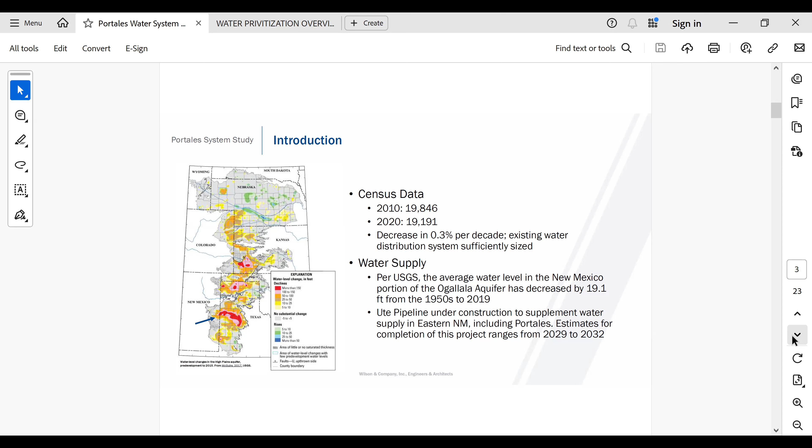We got all of the data from the operators here. We were able to come up with some numbers regarding the current water use in Portales. That's on that figure here. In 2023, Portales used 801 million gallons of water, and that came out to, all sources, about 115 gallons per person per day. And then we also looked at how much water was drawn from the wells to provide the city, and that came to 780 million gallons taken out of the Ogallala aquifer that year.

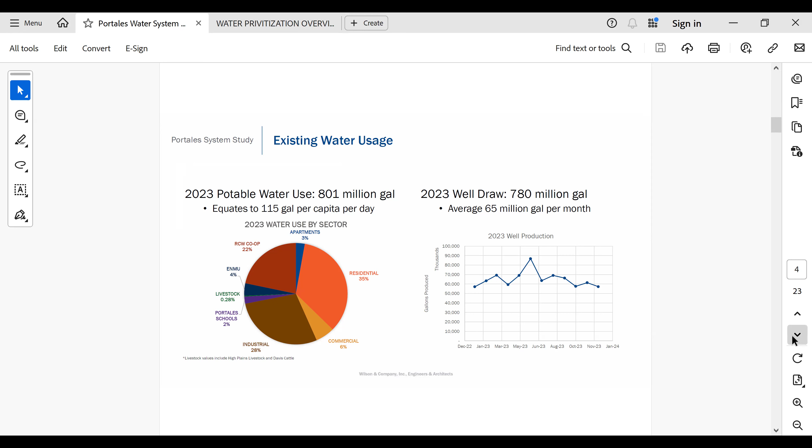If you're looking at those two numbers and realizing that they don't quite add up, the metering data kind of shows that Portales used more water than they took out of the well. And that can be accounted for by all of the meters that we're trying to sum up and equal out. The well field is very large. Does it say up there how many? I think it's up there at like 50 wells, and they all have their own personal meter. And then there's over 6,000 use meters.

So the difference between those two numbers, the amount of water used and the amount of water drawn out of the aquifer, really comes from just metering error in between the two. It's only a 1.9% error, which is fairly common when you analyze water systems.

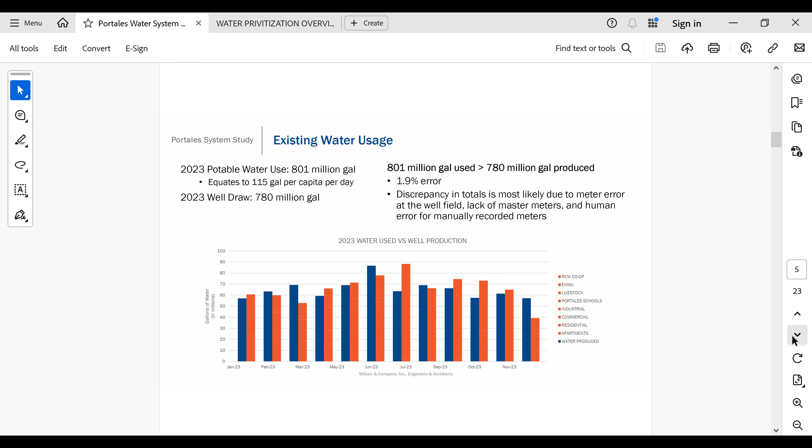Can everybody hear me in the meeting? Yes. Okay, perfect. My coworker worked on modeling the existing system, so I'm going to let them speak for the next couple slides. Okay, thank you, Graham. Hi, I'm Ezra Crumley. I worked on this with Graham. I'm actually in Albuquerque right now. I'm sad that I couldn't make it in person, so I'll be presenting online.

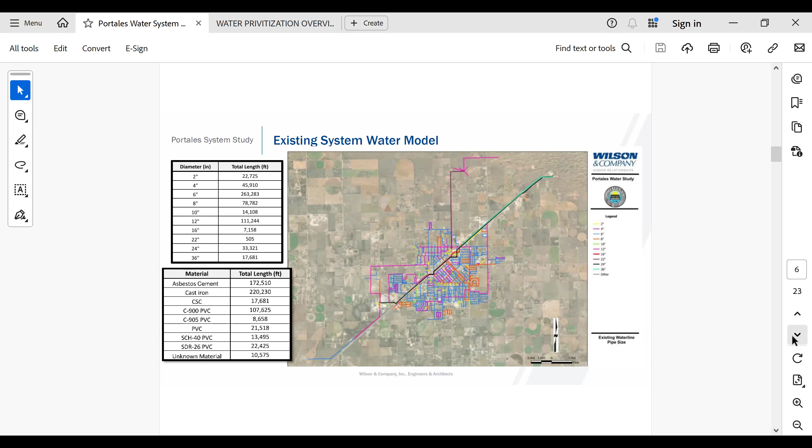So in order to model your current system, we worked with your utility department to get the existing data out of their shapefiles from the ArcGIS system, and we uploaded it into a water model program called WaterGEMS. And using it as well as the data that we have for the pipe sizes, like pipe diameters, as well as the pipe material, we were able to put together this model of your system. It also has meters as well as fire hydrants included. And in total, you guys have about 115 miles of water line for your potable system only. Next slide, please. Thank you.

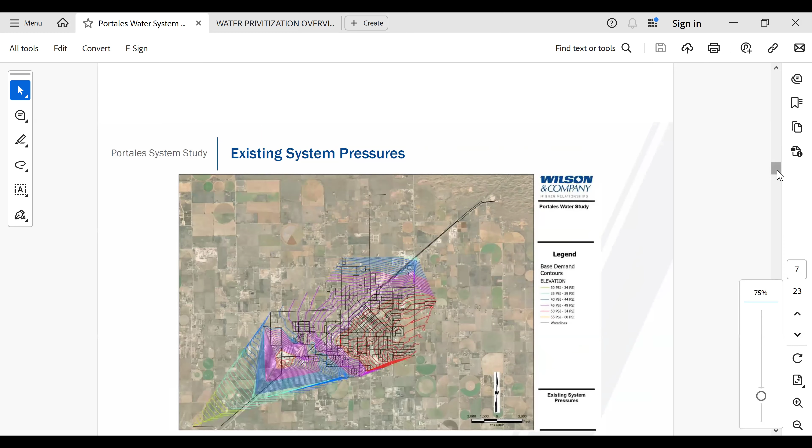So once we had the water model in the system, we also used all of your demand data. So we had all of the information from your automatically billed meters as well as your manually read ones. So your residential users, like your apartments, your houses, your industrial users, your commercial users, as well as the schools and the co-op were added to the system as meters. And using that as well as the hydrant tests that the city of Portales had conducted about a year ago, I think, we were able to model the pressures that you would see in your system.

So as of right now, it looks like your pressures are between 30 and 55 psi, with your highest pressures in the southeast section of town, and your lowest pressure is all the way down at the airport at that very last hydrant. So that hydrant has a psi of about 30, but your lowest in-town psi is over on Children's Drive, and that's actually at 40 psi. So it isn't uncommon to see very low pressures at the very end of a system. So this is normal.

We also see no major pressure fluctuations in the system. We see lower pressures, as I said, towards the southern part or dead ends where we don't really have that many users pulling water, where higher demands have the higher pressures in them, like around the industrial area and your southwest or southeast quadrant. Next slide, please.

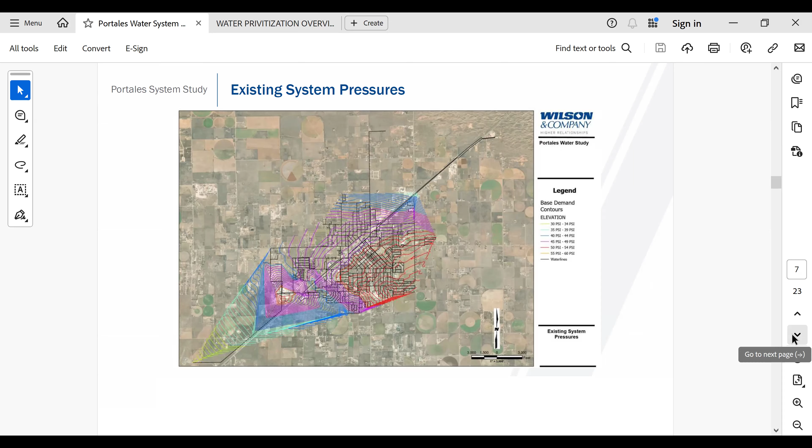Thank you. And then using the hydrant data, we also were able to calibrate the system to make sure that it actually kind of was in, oops. There you go. I'll keep talking. Thank you. We used it to calibrate the system. So using the in-person field tests, we were able to load those into our water model and make sure that our pressures were in line with what we see in the field. And good news, they all do.

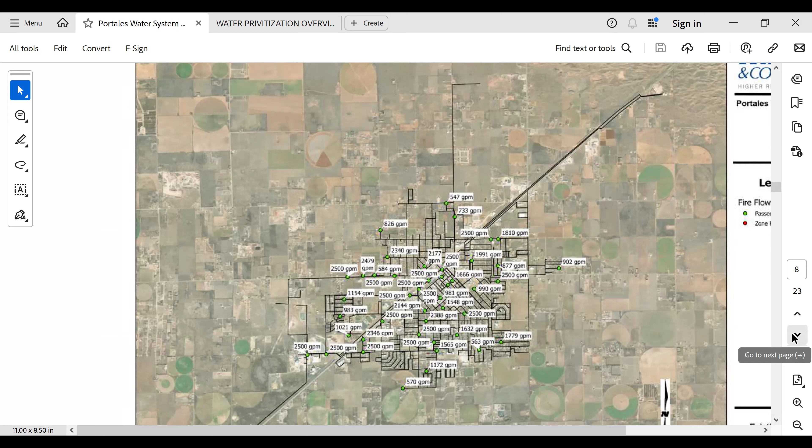We also ran a hydrant test to make sure that you guys could get fire flow through your systems, and it was run at 500 gallons per minute at a residual PSI of 20 per the Roosevelt County ordinance. Of the 45 hydrants that we tested, only one failed, and that was the one in the south at the airport again, and that is in line with what we see out of the field data. It also failed in the field. So good news, you have fire flow all over your town, which is very impressive. There are some towns that don't meet that. Next slide, please.

So just to summarize, under average demands, the system is working effectively with pressures ranging from 30 psi to 55. Your velocities are less than 5 feet per second as well; I think the average is around 3 feet per second, which is really good because it means that we don't have as much scouring problems and we're not really worried about your pipes deteriorating from the inside out.

You also have less than 80 psi throughout your entire town, which is indicating a low likelihood of pressure-related breaks. You don't need to have any pressure zones or pressure breaks in your system. It's all pretty evenly balanced out. Also, as mentioned, of the 45 hydrants modeled, only one failed fire flow requirements, and that's due to its location at the airport all the way in the south. It's a dead end and there's not really any flow going to it, so it's understandable.

Using all of this, your system failures are most likely to occur in locations with older materials or where the water line was installed incorrectly. So you're most likely not going to see a lot of pressure breaks. You're most likely going to see them along the AC trunk main like you have been, where it's been installed improperly next to the roadway, and in the older DI lines in the city center. Next slide, please.

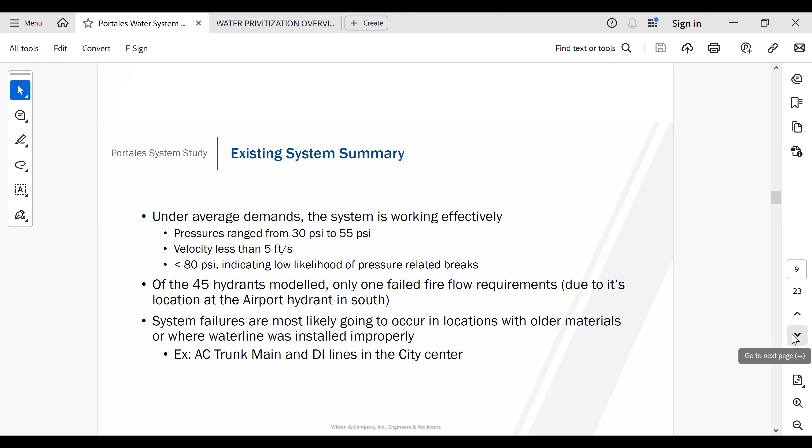So using all of that, as well as our system information, we had a couple of recommendations for your existing water. The first one would be to replace the 24-inch trunk main due to improper installation and proximity to the railroad. The trunk main is your main artery into town. It's moving most of the water throughout. So whenever it breaks, you have a big headache and you also lose quite a lot. By being next to the railroad and being improperly bedded, it tends to just fracture, according to your utility department and talks that we've had.

So we suggest replacing it as well as putting in more isolation valves to make sure that if there is a break, it's not going to be as much of a problem in the future because you can just isolate it, fix that one section and loop it back around another way. We also suggest adding an additional 3 million gallons of storage to the well field. That would be approximately $8 million. Sorry, I forgot to mention earlier, the entire trunk main replacement would be in total around $5 million. The additional 3 million gallon tank in the well field would be about 8 million.

This is suggested because your well pumps right now are pumping all the way from the bottom of the well over to your tanks at Johnson Hill. So that's putting a lot of demand on them and causing more wear and tear than is normally seen with wells. We also suggest that the SDR water lines be replaced because on the eastern side of your town, SDR PVC isn't a standard that New Mexico APWA accepts for pressure rated systems. In total, that line would be about 1.5 million to repair and replace.

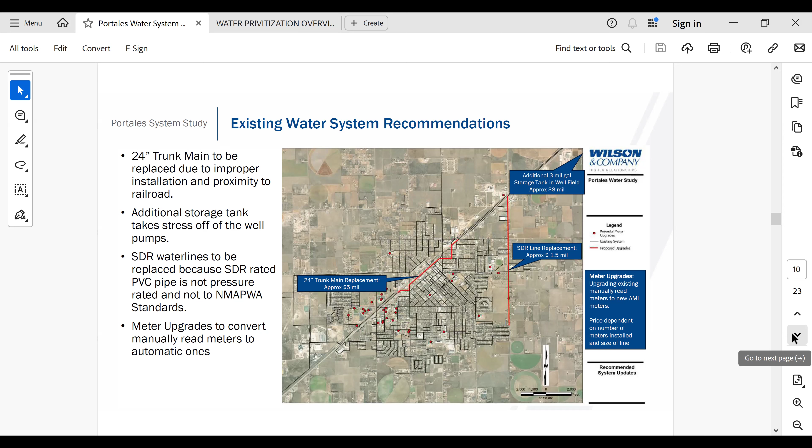And we also suggest doing meter upgrades around your town to convert the manually read ones. You have a couple, like the ones for the co-op, the ones at ENMU, some of the schools, as well as a couple of others around the area that are all manually read. Putting them onto automatic ones would allow your utility department to summarize them and have more time instead of going outside and reading every meter manually. It would just populate in their AMI system like the residential ones already do. And with that, I'm going to hand it back to Graham so he can go over your reuse system.

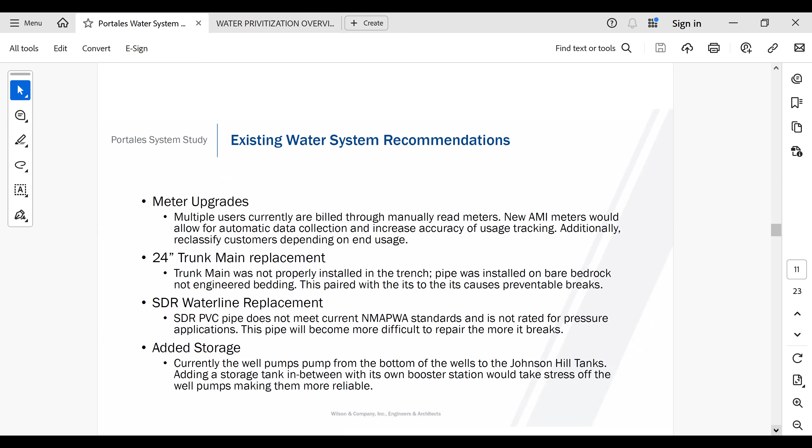And replacing those meters would also help with that error that I pointed out at the beginning between what's drawn out of the aquifer and used in the city. So yeah, the water line was very well designed and maintained. There weren't very many large red flags that we found with the water line. So then we started looking at the reuse system. Apologies, you could go to the next slide.

Oh. This is just for your reference later on if you print out the PDF and use it again, so you don't have to remember what I said in person. So thank you. Thank you, Ezra.

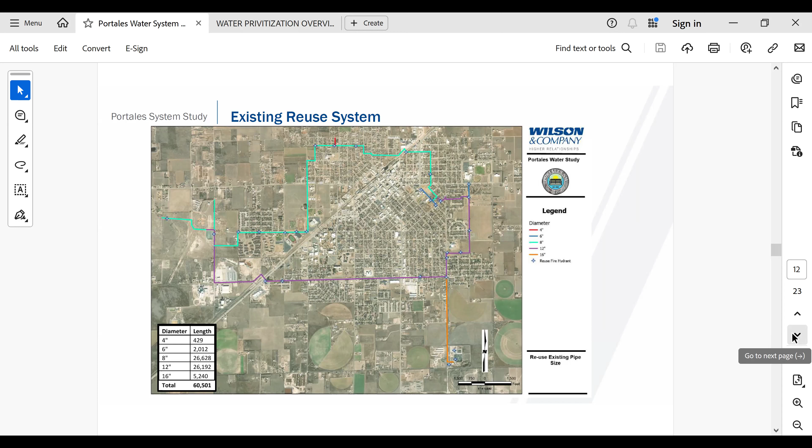Yes, so we started looking at the reuse system since your water system is doing very well, and there weren't a whole lot of large losses coming from your water system. We looked to see if we can offset more water use from the aquifer with the reuse system. The wastewater treatment plant right now is designed to treat wastewater to a class 1A reuse standard, which is the highest classification of reuse water besides treating it back to a potable standard. It's then pumped into the system you can see on the screen. It's one large loop that circles the entire city with a fair amount of fire hydrants connected to it. Next slide, please.

That's the next slide, or is there? Oh. Okay.

So when we were looking at the reuse system, we found that the water is being treated to a high standard, and then it is being stored in a large pond before it is treated through the tertiary standard to the class 1 reuse standard. And it is degrading slightly in the pond, which is making it harder to treat to the class 1A standard. The pumping system is also, in our opinion, undersized. So it is not providing a very strong and reliable source of the reuse water into the reuse system.

Those two variables combined make the reuse system not as reliable as we'd like to see it, and that's causing a drop in reuse users since it is not as available as it can be. So to remedy that situation and get more people using reuse water instead of fresh potable well water, we recommend repiping the wastewater treatment plant the way that it's shown on the screen.

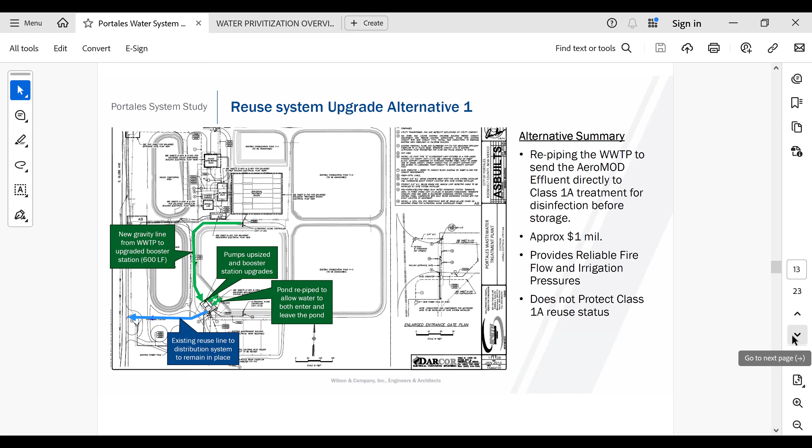Instead of storing it in the pond first and then treating it, letting the water flow right out of the treatment basin and go straight to the reuse treatment process, and then upsize that pumping station with VFD pumps that'll allow you to control the pressure and the flow out of those pumps to meet whatever demand is currently needing. And that will allow you to reliably discharge and produce reuse water to anyone who needs it in the city. And I think that with a more reliable source of reuse water, the amount of users will go up, and that'll be less users using the potable water.

Another scenario or alternative that we looked into to upgrade the reuse system was to reuse an existing water tower that is in Rotary Park. Right now it's abandoned, but if that were to be rehabilitated and put on the reuse system, that would always be full, and with the same pumping system you have now, that would provide temporary storage and all of the availability and the pressure and the flow that you would need to continuously keep the system fully charged.

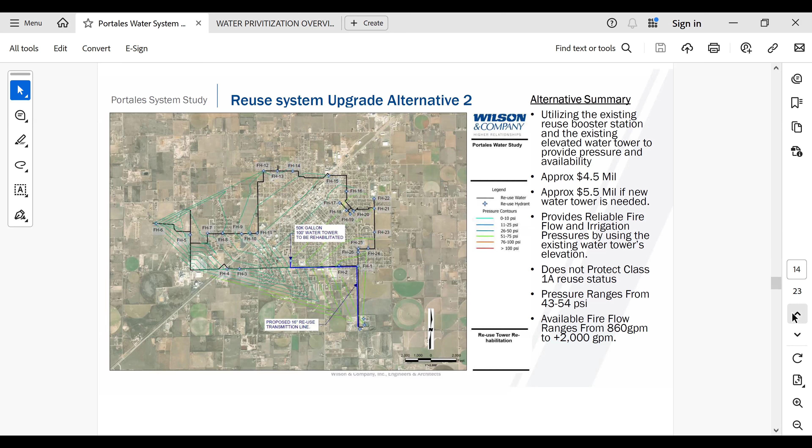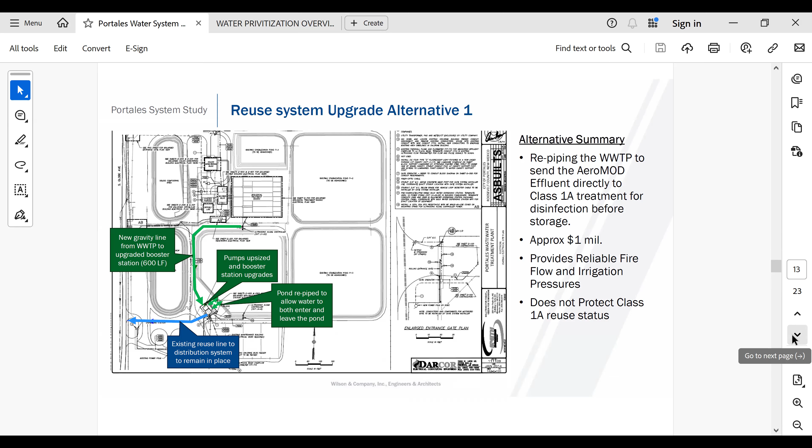Can we go back a slide real quick? I'm sorry. I also forgot to point out that this improvement would cost approximately $1 million, being just a pumping system rehabilitation and upsize and a new gravity line. And then this system, being an entire water tower rehabilitation, is slightly more expensive. It comes out to $4.5 million unless the Rotary Park water tower were not rehabable and you need a new one. That would put it at $5.5 million.

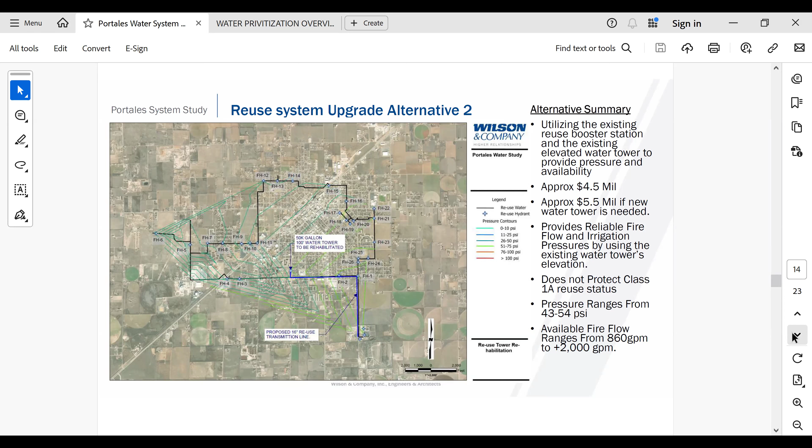This system, we also modeled in our water model the same way we did the water system, and using that tank would get you 43 to 54 psi throughout the entire system, with most of those purple reuse hydrants able to supply over 1,000 GPM each, which would be more than sufficient for fire flow, especially regarding the Roosevelt County standards. Next slide, please.

A third alternative here, another way to help the contamination issue in the large storage pond after wastewater treatment, would be to add another tank. Adding a 1 million gallon tank here would hold several days' worth of reuse water use, and that would keep it from deteriorating in the open air pond, as well as provide more reliability and availability with the reuse water, allowing more people to have it when they need it. And this also comes with an upgraded booster station as well. This alternative costs roughly $4 million. Next slide, please.

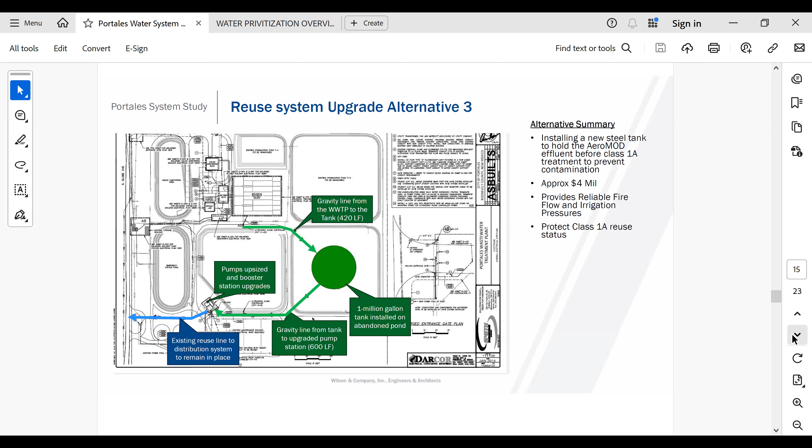So out of all the recommendations that we just made, there are certain priority recommendations that we suggest you do sooner rather than later. On the water distribution side, that would be updating the meters and adding tank meters that would reduce the error in the data and allow us to analyze the system with a bit more precision, and it would just give everyone, including you guys with the city, more of a look at what the city is doing with the water. There were some users and some discrepancies besides just the 1.9% error that could also be cleaned up with a whole meter updating program.

And then replacing the 24-inch trunk main in the middle of town, we recommend replacing that sooner and prioritizing that upgrade, because when that breaks, you lose a lot of water and it turns off a very large portion of the city. And that's why we prioritize that one over the SDR upgrades.

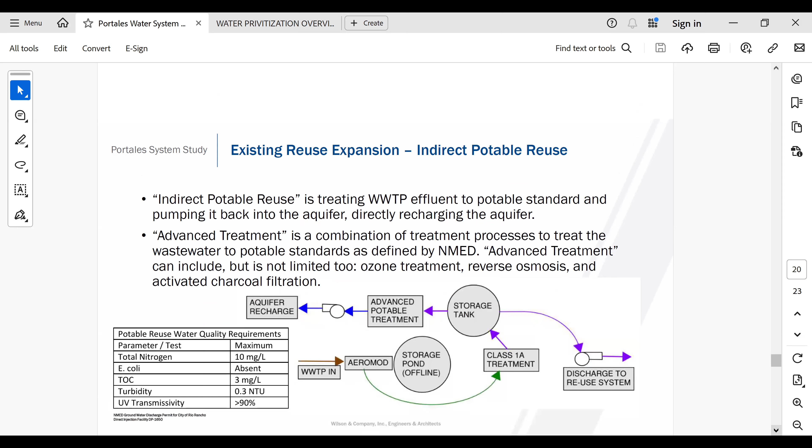That being said, in ongoing conversations with the Office of the State Engineer and the New Mexico Environment Department, we've been talking with them to see if there are any other options for the rest of the reuse water and if there's any more ways we can utilize that more efficiently. That is where the idea of indirect potable reuse comes in. Currently, Rio Rancho is the only city in New Mexico to have a functioning indirect potable reuse system, which is where the water is already treated to a Class 1A standard, which is what I said earlier is the highest quality of reuse water that is available before you treat further into potable water standard.

The technology is available to treat the Class 1A reuse water all the way back to a potable standard and then re-inject it into the aquifer for future storage. You can see the diagram up on the screen is a simple diagram of how the wastewater treatment plant would look. You could take the storage pond offline completely. There would be no more need for above ground storage, except for a storage tank to store the reuse water that is going to be used for reuse only, which would be that 22 million a year that we showed a couple slides before. Not a 22 million gallon tank, but a smaller tank that people could use to irrigate with that water.

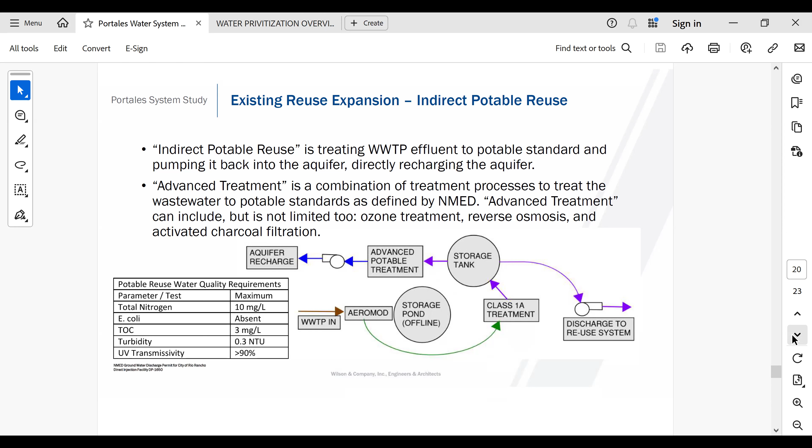I know you've been doing a lot of community outreach regarding the water. We are using a lot less water per person as Portales citizens. It seems like the outreach has been working. A personal use of 43 gallons per person per day is a pretty impressive number. So there's always the possibility of increasing public education, but what you guys have been doing has been working.

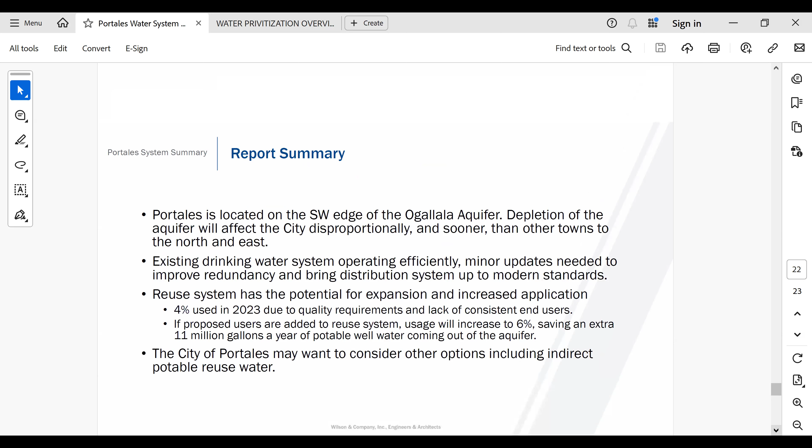Next one. All right, it's a big report and there's a lot in it, so we tried to summarize it in a way where we got all of the important details. But here's the final report. Yeah, okay. Oh. Okay.

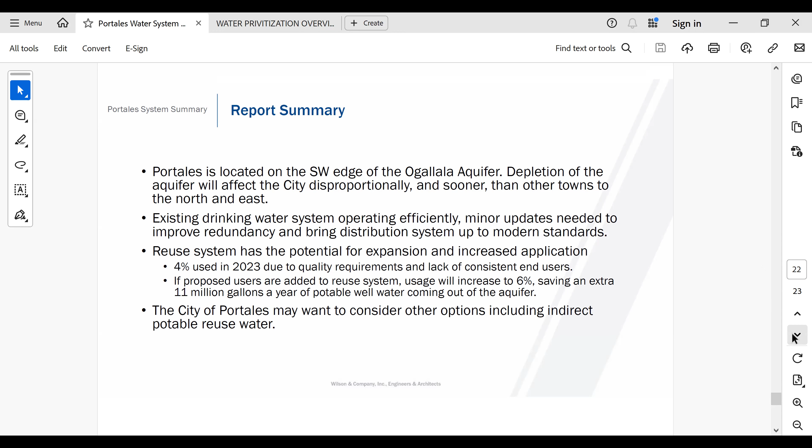You know, we're on the Ogallala Aquifer. It is depleting. It is a problem that we are very aware of. But with a combination of outreach and advanced treatment options and using more reuse water, I believe that a lot of stress can be taken off of the Ogallala Aquifer, and I know the Ute pipeline is coming in. Those two things combined should be able to provide plenty of potable water for Portales. So that being said, any questions? I'm sure there's already a hand up.

Yes. I would like to start with one that you brought up right toward the end. It sounds great to re-inject the water back into the aquifer, but we're a very small community that's using water out of that aquifer. We've got Texas pulling out bucketloads more than we're using. So spending that kind of money to put it back in for Lubbock to pull out just doesn't make a lot of sense to me. So can you explain how that's going to help Portales and not just the people who are pulling out way more water than we are? Yeah, that's a very valid question. Water in the aquifer does move quite slowly.

So some of the water you inject will probably end up in Texas, but part of the research part of designing all of that advanced treatment does come a very in-depth geological survey where they map out the gradients and the direction that the Ogallala water is moving. So there would be a way for you to, in theory, inject the water in a place where it'll pass straight through the well field.

And yeah, water in aquifers does move very slowly. So if it doesn't get picked up by you in the well field, it may move to Texas, but it should directly impact you first before passing it. That's good. Yeah. Thank you. That's very helpful. Of course. Anything else?

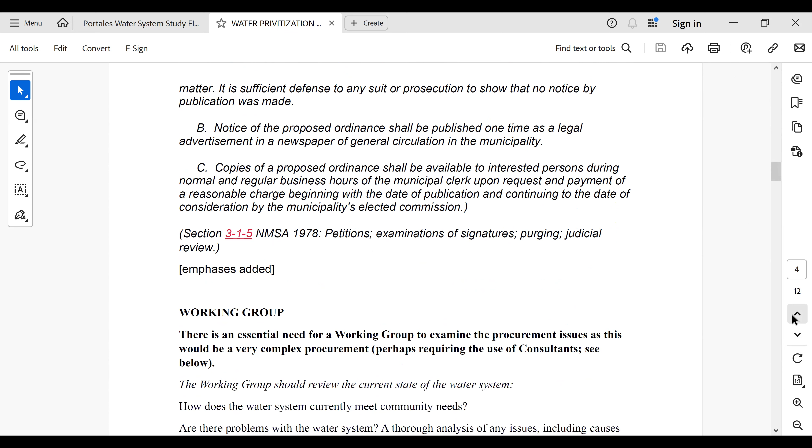But there are other statutes that are involved, depending if you're franchising, leasing, selling, whatever. And if you were to do an RFP for this, it would be a really complex RFP, as you can see from the questions on the pages. And I would advise, as someone who's been involved with really complex procurements, that you would hire consultants on this to help you make sure that everything in the RFP and then the contract, you have everything in there you need to have in there to cover yourselves.

Specifically, buyback provisions are outlined in the pages. Pretty much everything that I mentioned that the working group should look at and that the RFP should have, most all of that should be reduced to the eventual contract, whether you do it through an RFP or you do it through a negotiated sale or what have you. So I think that's key, is to look at all of those things and make sure they're reduced to the contract.

Those are the major points I wanted to make. As I say, you can look at the 12 pages. Hopefully you have, and if you have any questions, I'm more than willing to try to answer them. I've got a couple of questions. Go ahead. Okay, Paul, in this first part, you talk about the sale or lease of property, and then if that were the case, that also has to be approved by the Board of Finance. Is that not correct?